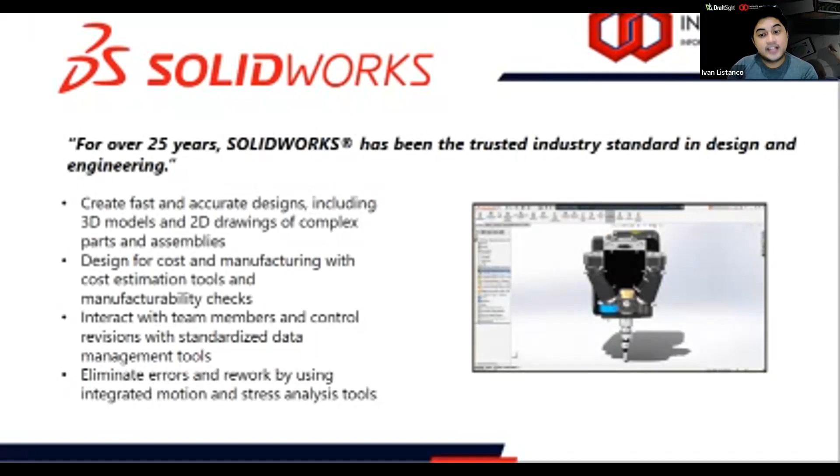Some of our solutions include SolidWorks, a 3D parametric modeling tool used by mechanical designers to create product designs, which can aid manufacturing. Second is DraftSight, a feature-rich 2D and 3D CAD solution that lets you create, edit, view, and mark up any kind of 2D and 3D drawing file with ease, speed, and efficiency.

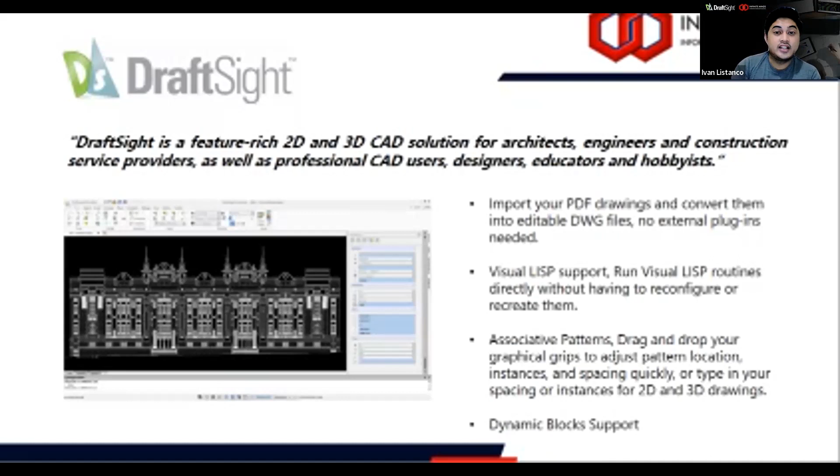So what's the difference between SolidWorks and DraftSight? SolidWorks is more on heavy 3D CAD. However, DraftSight is more heavy on 2D, though it has 3D, but it's not as heavy as SolidWorks with regards to that.

Our last product that we offer is 3D Experience, the newest solution of Dassault Systèmes. This is a cloud solution that brings all your key stakeholders together on a single collaborative platform, allowing you to seamlessly move from ideation to delivery through continuous development. Connecting the people, applications, and real-time data from every aspect of your business helps you improve execution, increase productivity, and accelerate innovation.

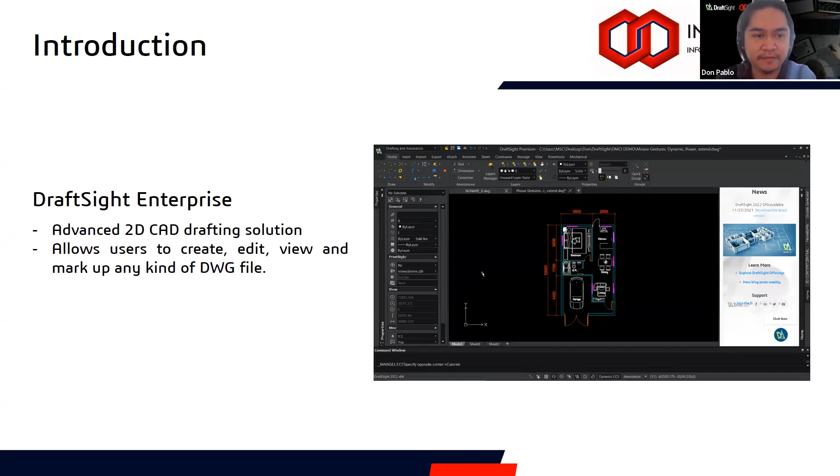We also have DraftSight Enterprise Plus, which is basically DraftSight Enterprise plus 2D constraints and 3D design experience. So that's the difference between our DraftSight Enterprise and Enterprise Plus. In Enterprise Plus, you can create your own 3D with your basic modeling tools.

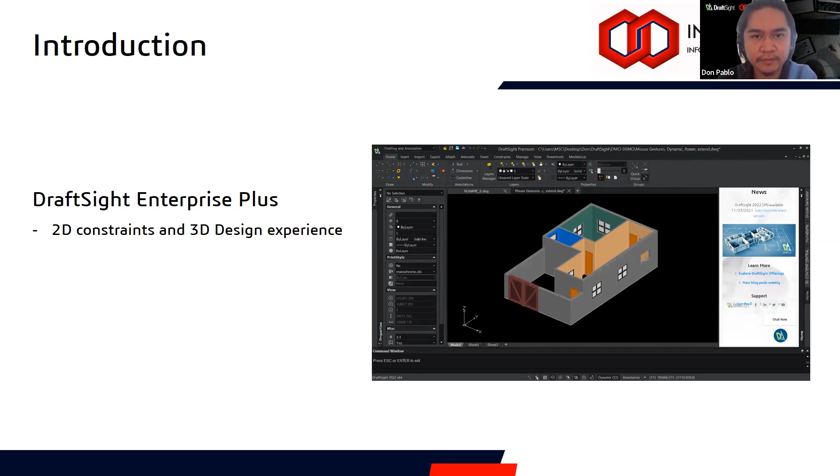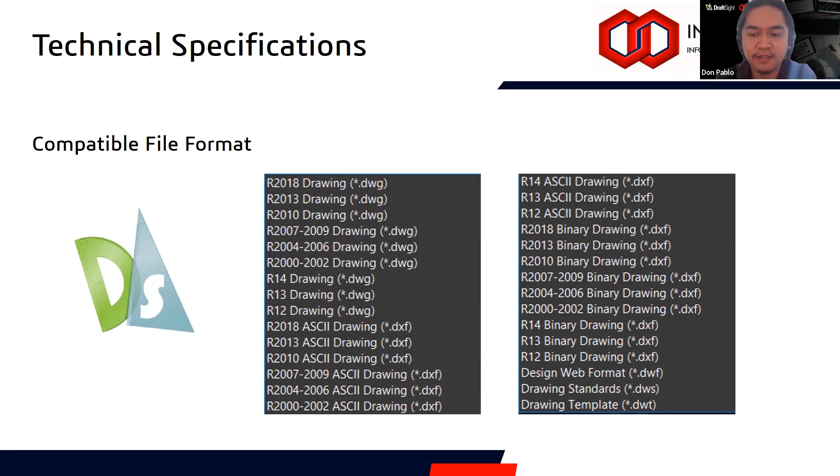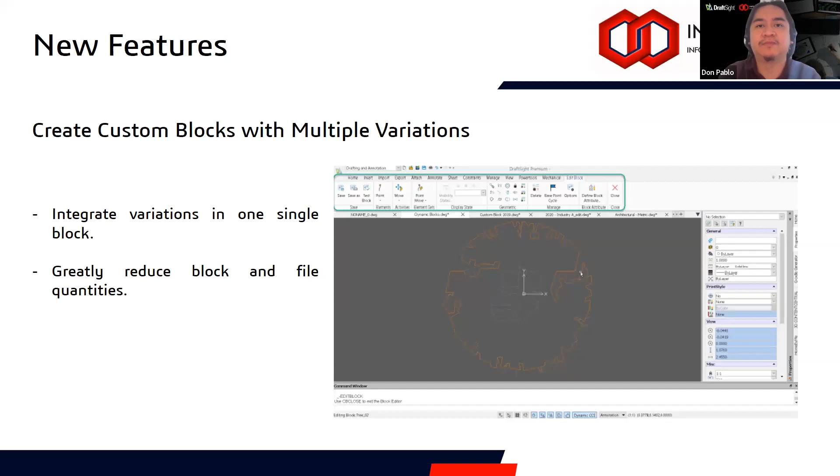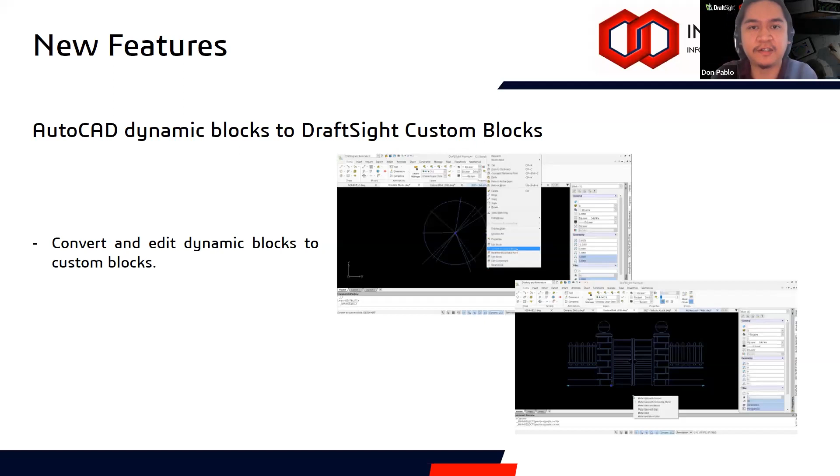Okay, so next, in the past, in Draftsight 2021, you could only read dynamic blocks from AutoCAD - you could only open it in Draftsight 2021. But in Draftsight 2022, you can actually convert these dynamic blocks into custom blocks and then edit it in Draftsight. This is also great since you won't be hassled - for example, you have old files from AutoCAD that are dynamic blocks and you want to add variations or design to it. You just have to convert it to custom blocks and then you can add a new variation. Later on, I'll show this in our technical demo.

So next, for our sheet set manager, this is already available in Draftsight 2021. Wait, let's proceed with the video.

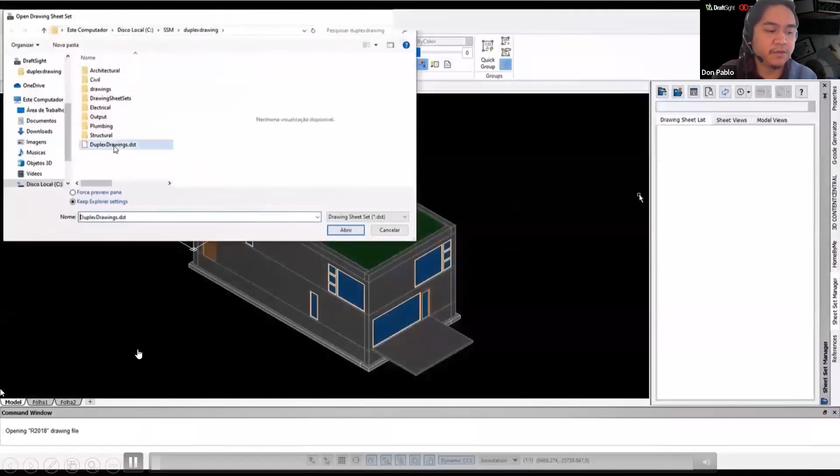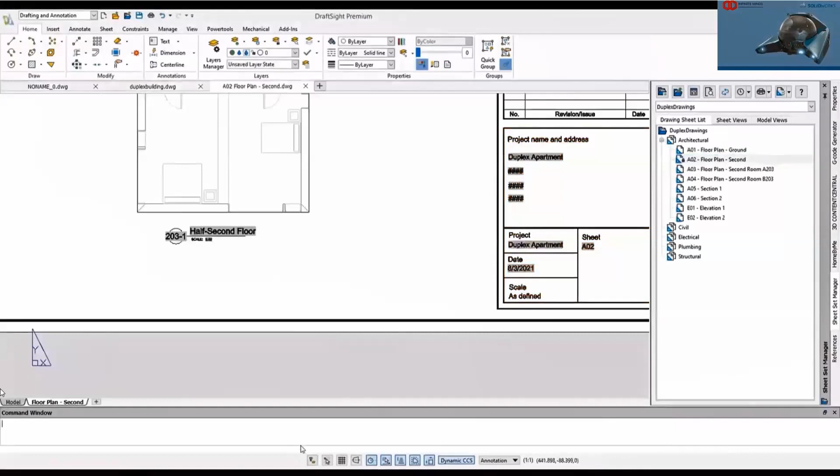Okay, so this was released in Draftsight 2021 SP2. It is an organizer to help you manage a large set of drawing sheets across multiple drawing files, without having to actually open them. This way you can control selected sheets more precisely and efficiently. You can apply properties from the top level to save time and ensure consistency, and as you can see in the video, you can actually apply it without having to open that file.

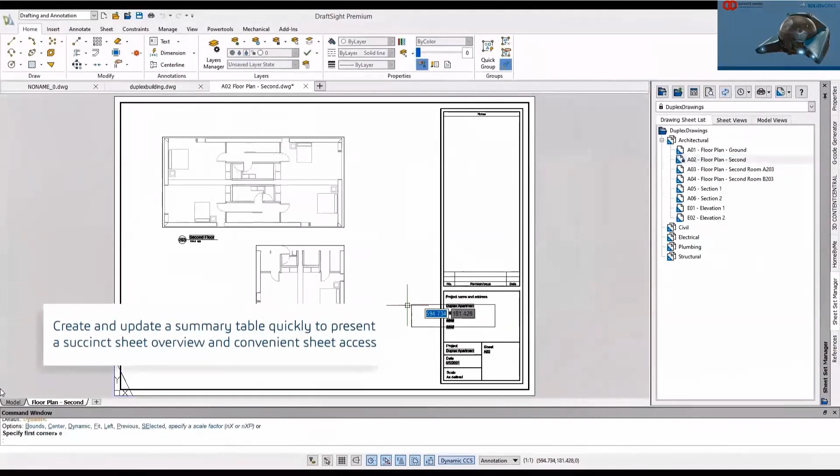In Draftsight 2022, additional enhancements were provided to the sheet sets manager functionality. As you can see, you can now create a summary table based on sheet sets.

Also added is a name selection set feature. This is an added option where you can name a selection and recall it to use later on. This is very useful in cases wherein you need to perform and reproduce actions, so you don't need to open the file and create an action like plot or publish.

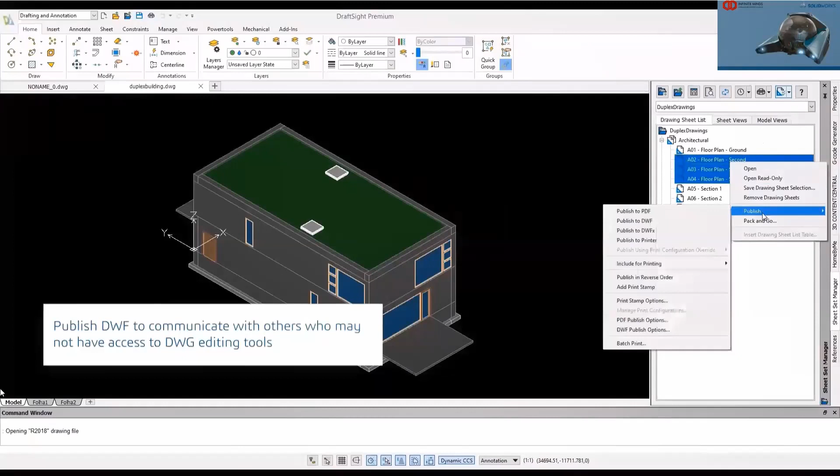Next, what if your user or other teammate doesn't have DWG editing tools? You can actually publish these sheet sets in a DWF file so that they can review these files without having to use DWG editing tools. That's a great feature if your teammate or other project member just wants to review your file. So that's our improvement to the sheet sets manager.

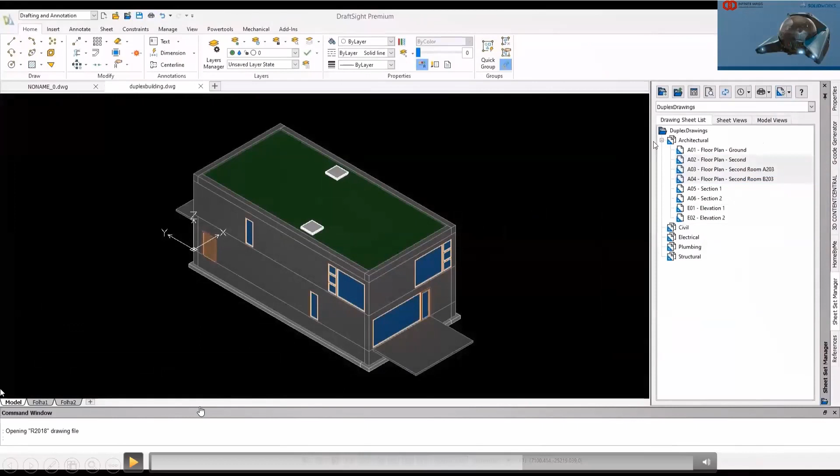Moving on, this is my favorite feature that had been added in Draftsight 2022: dark mode. If you're familiar with AutoCAD, this feature has been there for a while already. It has been added to Draftsight to improve user vision and alleviate fatigue and exhaustion, and also reduce eye strain.

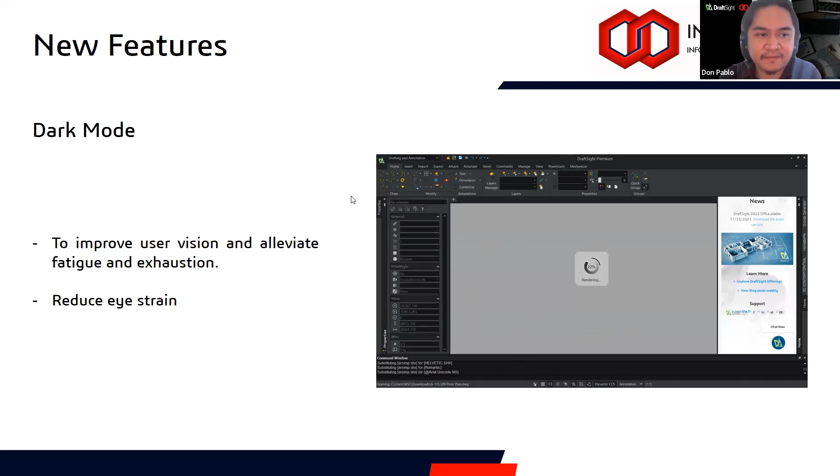Next, splines have also been improved. You now have a new method for creating splines, which I'll show later. What's the purpose of this? For our designs, splines are very useful, especially for irregular shapes. In Draftsight 2022, the way you use splines and other related functions has been improved.

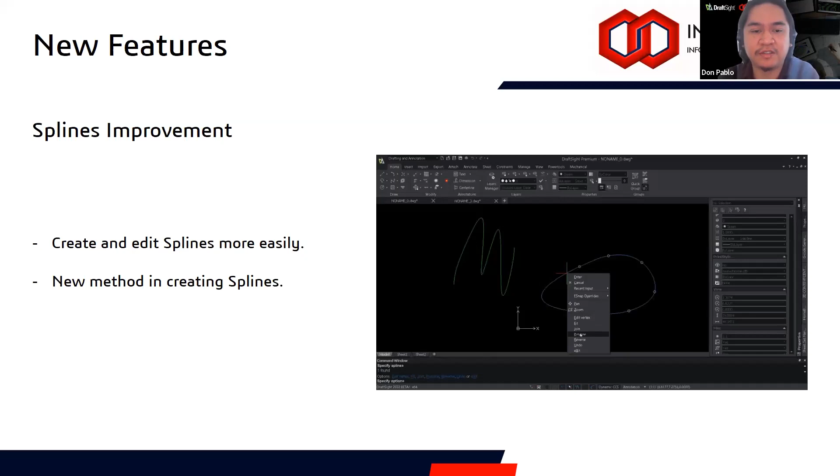For our associative pattern feature, this is already present in our Draftsight Enterprise Plus, but for Draftsight 2022, it has also been added to Draftsight Enterprise, so we can now use it there.

Let us now move on to our technical demonstration. Just wait a bit, I'm going to share my screen with Draftsight.

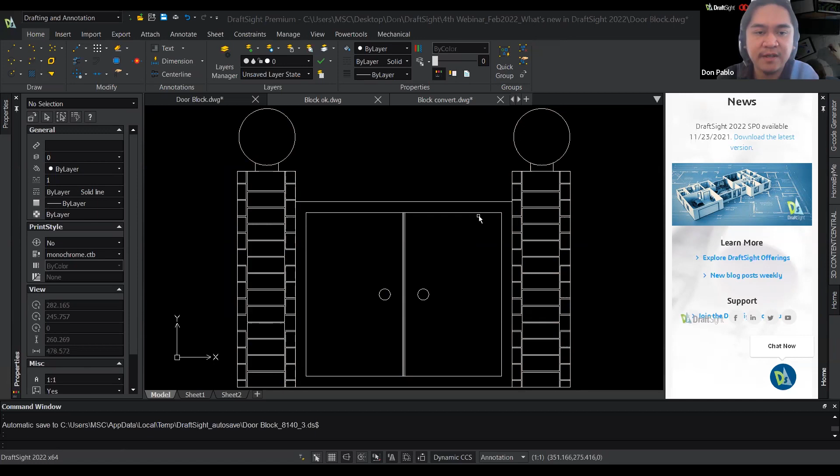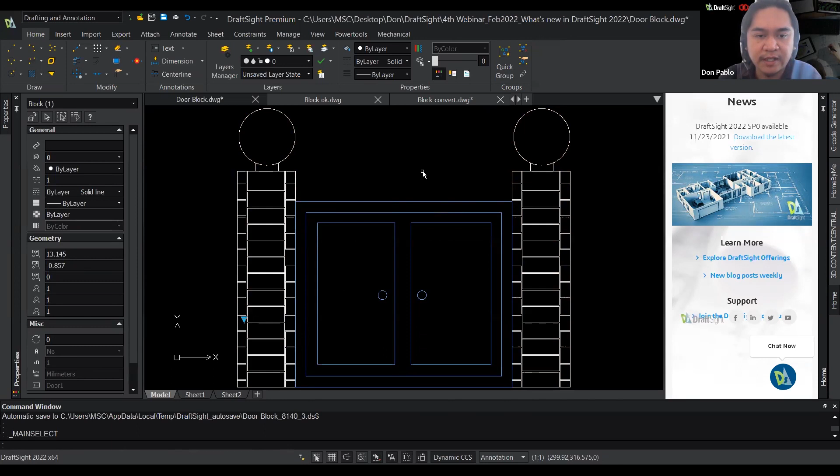As you can see, this door is a custom block. I say that because it is actually created inside Draftsight. As you can see, I have two variations here, and I will prove that we can now create custom blocks in Draftsight. We have our edit block function where you can add a point, and you have these features already in Draftsight 2022.

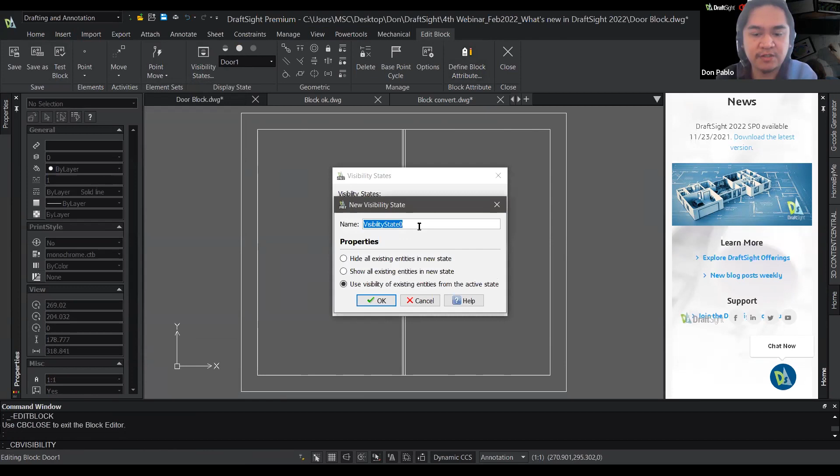You can also add visibility states, so let's try adding a visibility state for this block or variation. As you can see, the yellow arrow is pointing at door 3, indicating that it is already the active state. You can also change it here and double check.

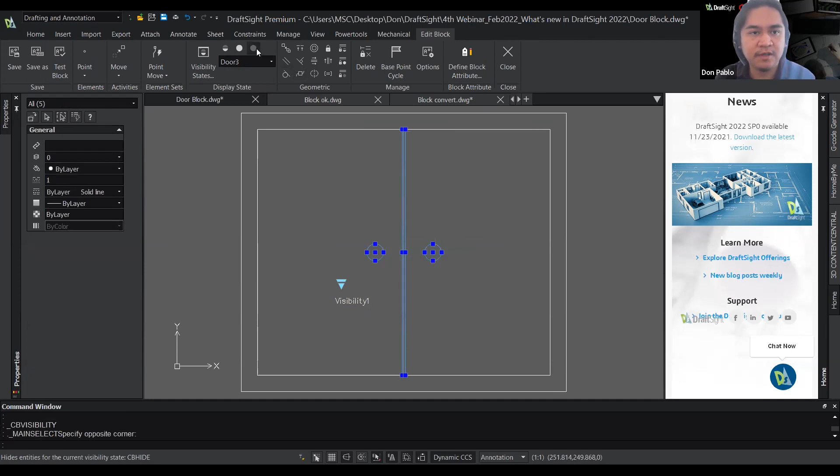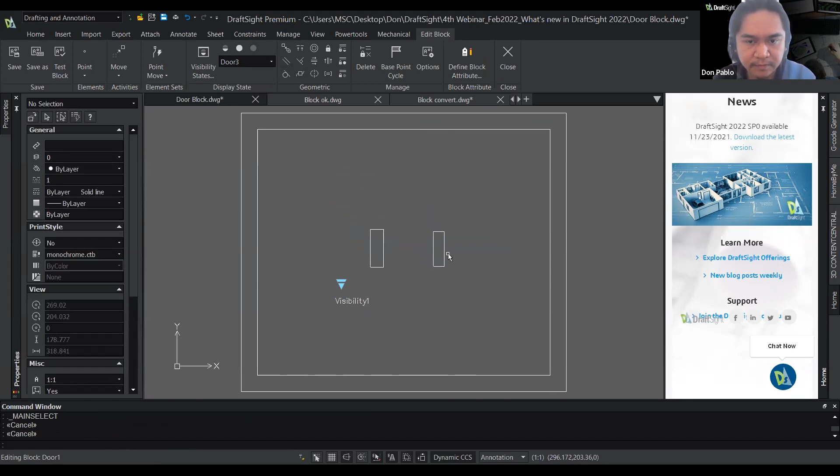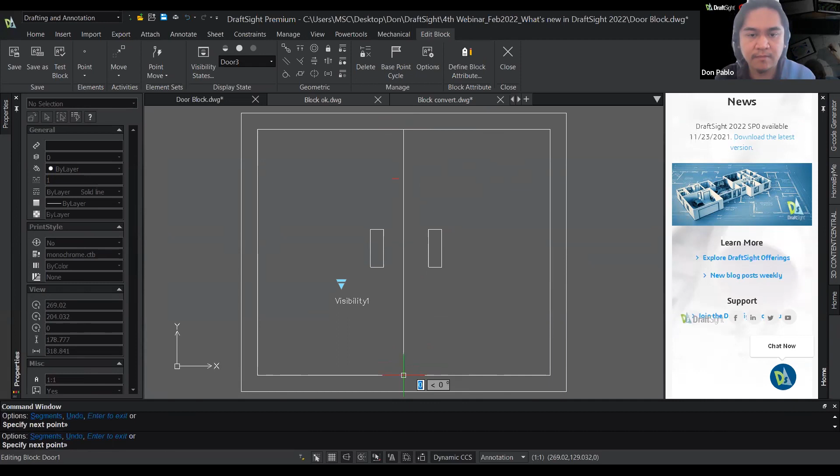So for our door 3, let's remove or hide this function, and then let's create a very quick sample here. This is just to show you that we can create custom blocks here in Draftsight. Let's create a line — that's how you create your new variation or custom block in Draftsight.

Let's double check — just click on that, and we can see that the state we just created, which is our door 3, now appears. Imagine in the past, without custom blocks in Draftsight, we couldn't create this; these 3 doors would automatically become 3 separate files. But with the custom block function, they're all inside just one file.

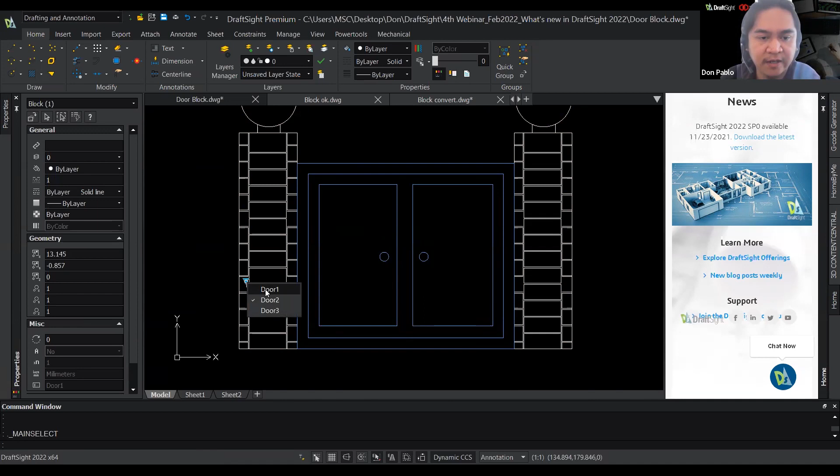So it's easy to access — you don't have to look for many files. For example, with this door, you just need to find the door file, and then you can select variations through it.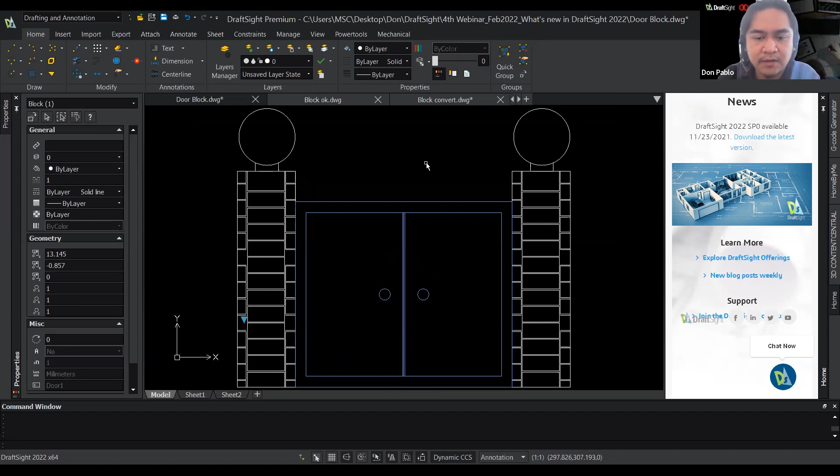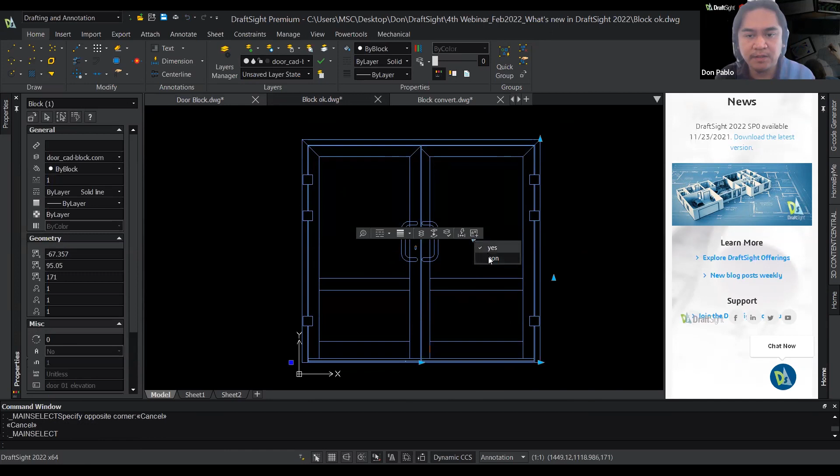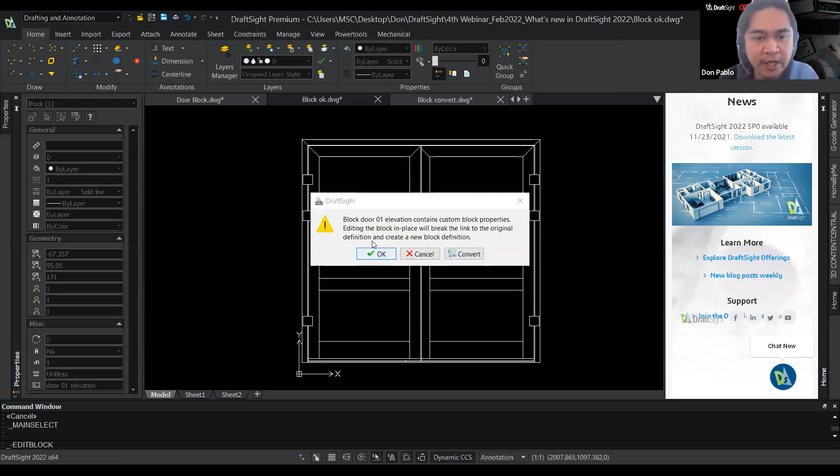Let me right click and select edit block. And then you have here two options, let me show you these two options. First off, if you click on OK, let us see. As you can see, it's just a plain drawing now. So we can't see the other variation that came from AutoCAD or other CAD. That's the function when you edit block and click on OK.

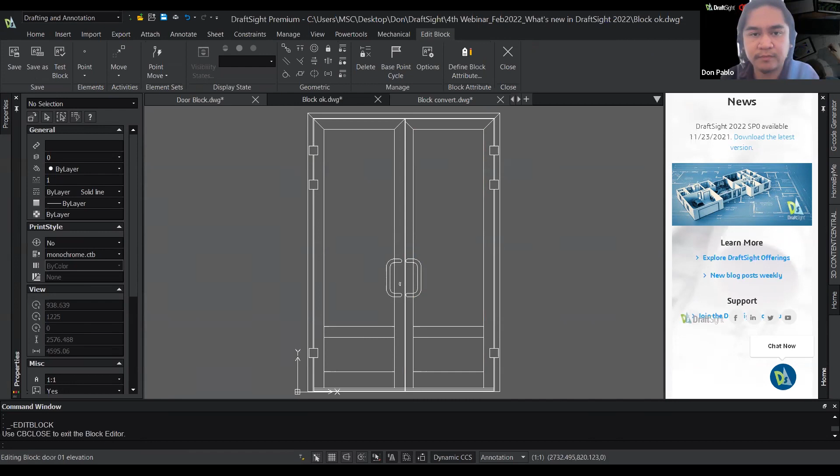Let's proceed with another. I have here another sample, same sample lang siya. So let's try the option na convert. When you click on convert, as you can see, it carries over the variations we made into our custom block. So I think converting is better since we already have a reference for our custom block. So yeah, that's the two ways: you can click OK and the variation from other CAD is gone, or you can convert, which might carry over the variations made.

Just a reminder, you can open dynamic blocks in Draftsight. You can convert them, but once converted into custom blocks, you cannot open them in other CAD applications. So that's one uniqueness of our custom block - only in Draftsight can we create it, only in Draftsight can we edit it.

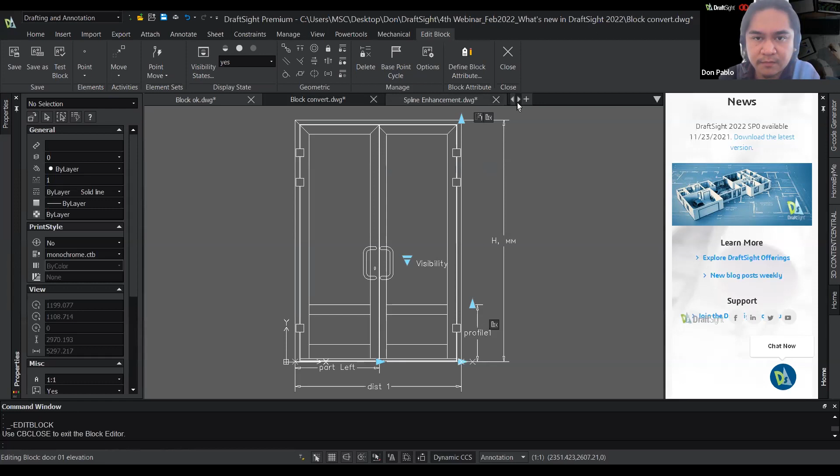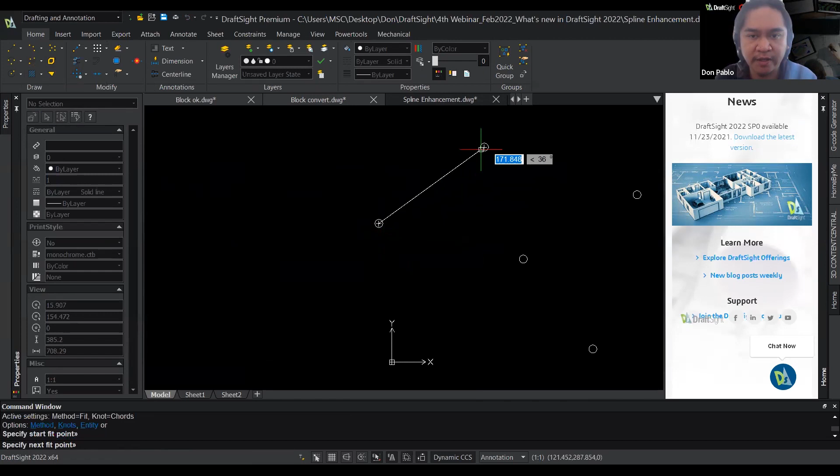Okay, so moving on. Let's now move on to our spline enhancement. So in the past, when creating a spline, this is the traditional way to create a spline. As you can see in our spline, these are our fit points. That's all that was present in Draftsight 2021 and older versions.

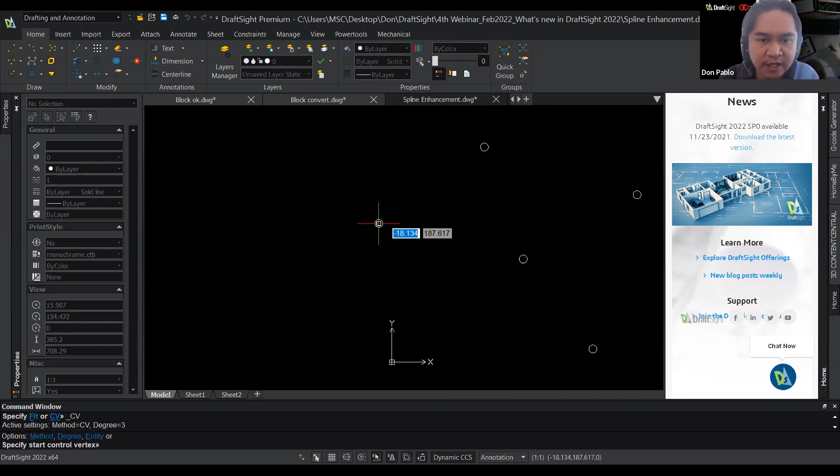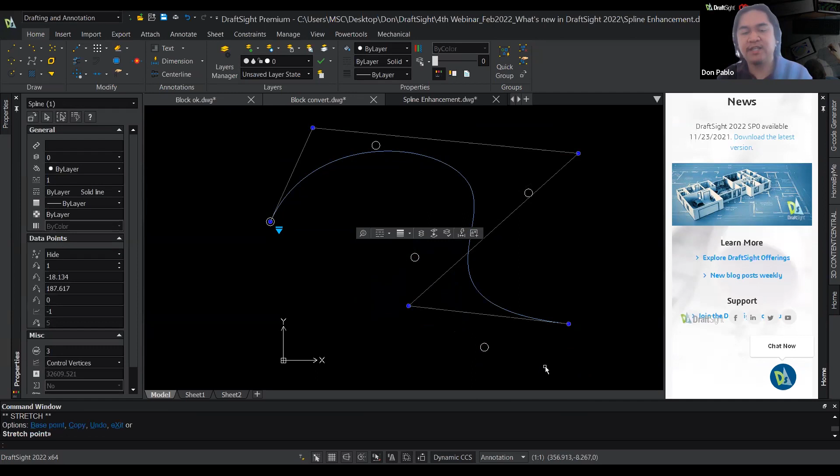But now in our Draftsight 2022, there's actually an added function which is spline CV, or our control vertices. So now when creating a spline, you can actually create your control vertices. So which one is easier for you? That depends on you on how you use your spline. But with this, you can set the limit points with these vertices. That's how you create your spline now.

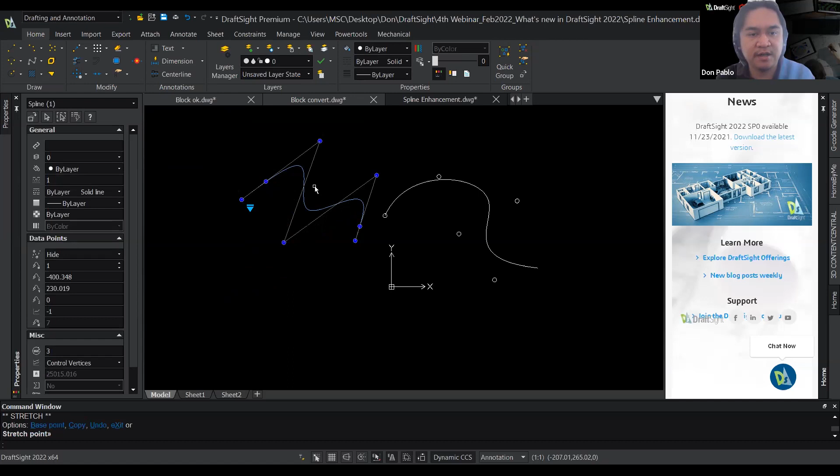So this is an added function. Another one is that you can actually create a spline fit, let me show you this. So with spline fit, there's two options already - you can use the control vertex method. Automatically it generates these two variations with our spline fit. You can also go back to control vertices. That's our new functionality in our spline.

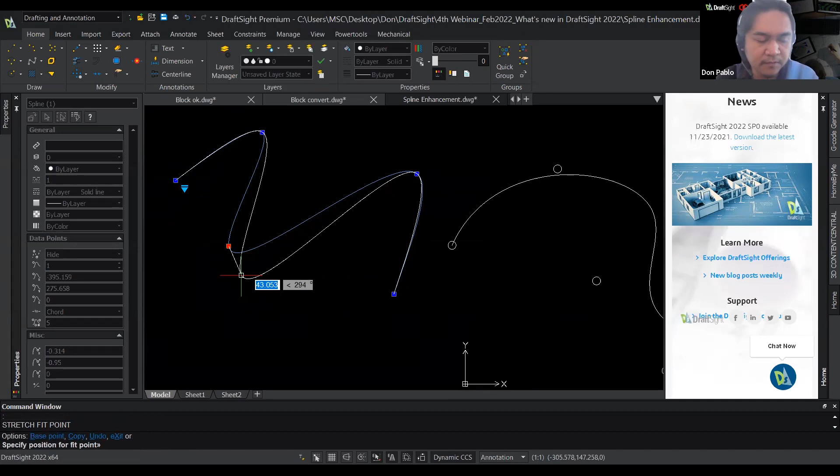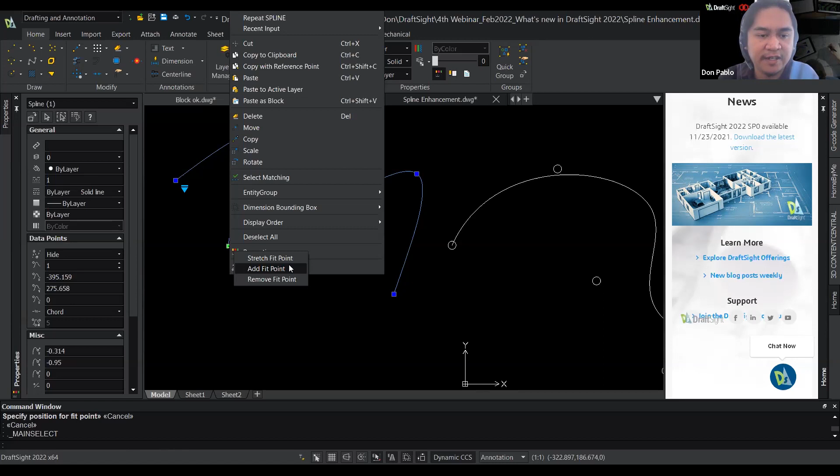And also when you right click your point, you can actually add a fit point, stretch fit point, remove fit point. This can make creation of splines easier and more flexible, since our spline is somewhat complicated, or used for irregular shapes.

So that's it for our technical demo. Let's go back to our presentation file. Just a moment while I go back to my file. Okay, so that's it for our tech demo.

Okay, so for our Q&A, are there any questions, Ma'am Bless, from our audience? I think none yet, Sir Don. Okay, so I hope, I assume that since there are no questions, they understood my presentation. Yes, I hope that's the case.

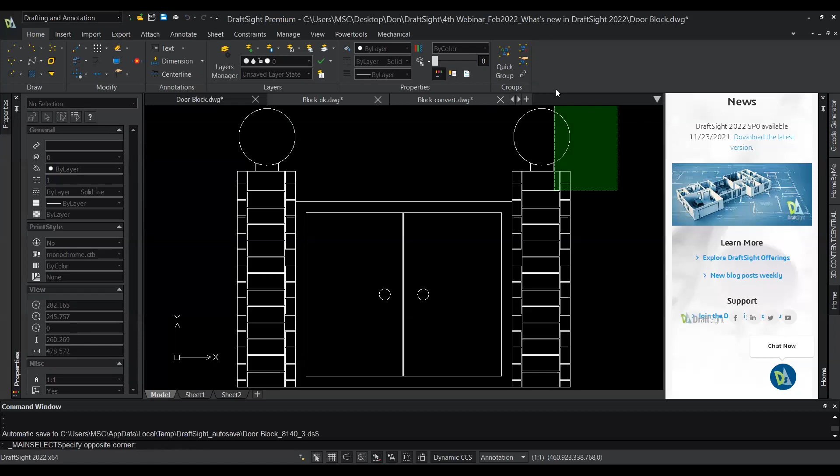For example, what I know is our purge and clean. Wait, I'm just going to share my screen for a bit to show the commands. Okay, can you see my screen, the DraftSight? Yes sir. Okay, thank you.

So as you can see here, when I type purge, actually purge is from the AutoCAD command, right? As you can see here, we see clean, which is actually a DraftSight command name. So they have the same functionality, but different command name. That's the only difference. And yes, we can use our commands from AutoCAD.